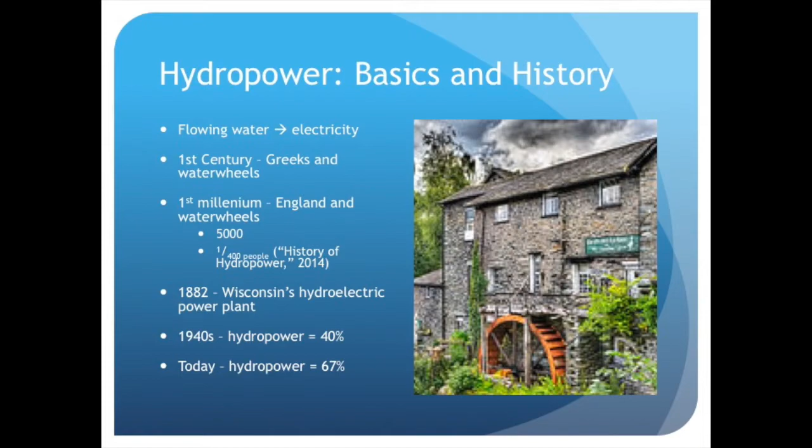The world's first hydroelectric power plant utilized the flowing water of the Fox River in Appleton, Wisconsin, beginning its operation on September 30th, 1882. 4 years later, about 200 hydroelectric power plants sprung up across the United States. By the 1940s, hydropower was providing 40% of all electrical generation. Today, electricity generated through hydropower makes up 67% of all renewable energy output.

Hydropower generation makes up the majority of all renewable energy electricity output due to its popularity, especially in China, Canada, Brazil, the United States, and Russia. Its popularity can be accounted for by the many advantages of using hydropower.

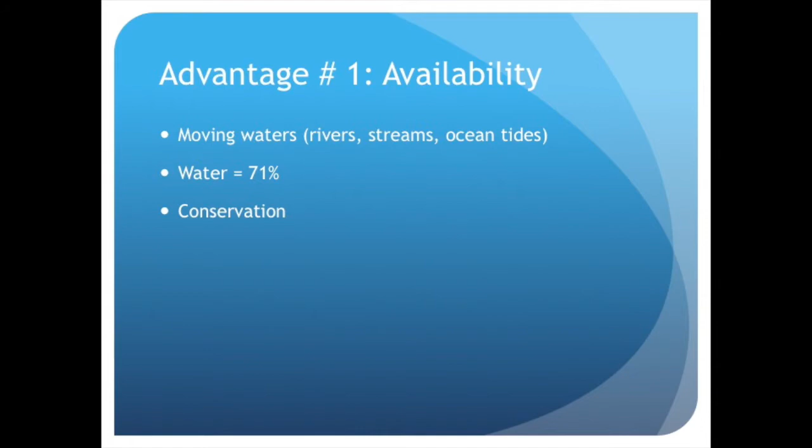First, there is the availability factor. Hydroelectricity only requires moving waters such as rivers, streams, and ocean tides to generate electricity. While water is not an unlimited resource, it covers 71% of the Earth's surface. Thus, as long as water is conserved and used efficiently, hydropower can continue to be used to create electricity worldwide.

The second advantage to utilizing hydroelectricity is its reliability. The demand for electricity can change rapidly, yet hydropower facilities can quickly go from zero power to maximum output, easily catering to these changes. Developing countries manage to function without electricity, but for the majority of the world, it has become a necessity.

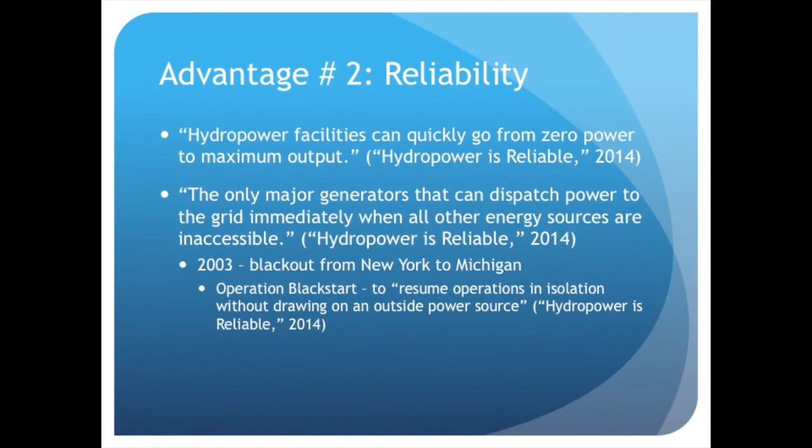Hydroelectric power plants are invaluable sources of backup energy because they are the only major generators that can dispatch power to the grid immediately when all other energy sources are inaccessible. This phenomenon was seen in the 2003 blackout, which affected an area from New York to Michigan, leaving 50 million people without electricity. The Niagara Falls and St. Lawrence hydroelectric plants restored power almost instantly, an operation called Black Start, which is the ability of hydropower plants to resume operations in isolation without drawing on an outside power source.

The third advantage of hydropower is its affordability. The figure below, provided in 2010 by Navigant Consulting Incorporated, compares the cost of maintenance, operations, and fuel for various sources of electricity. Hydropower is the least expensive, costing only 2 cents per kilowatt hour. In comparison, the most expensive source of electricity is photovoltaics, which cost 16.5 cents per kilowatt hour. Hydroelectric power is affordable because it generates electricity only from moving water. Thus, prices don't depend on unpredictable changes in fuel costs.

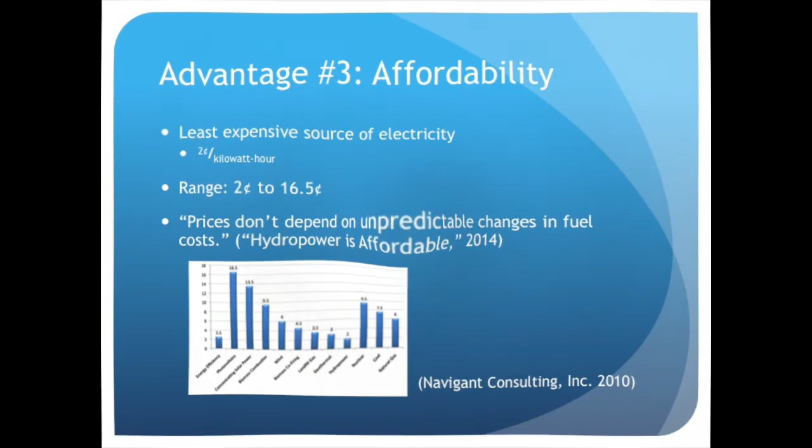Finally, hydroelectricity is sustainable. Countries use hydropower because it does not pollute the air, nor does it produce any toxic byproducts. Without the use of hydropower, nearly 200 million metric tons of carbon pollution would be released into the air, which is equal to the output of over 28 million passenger cars.

The map below illustrates the United States 2002 carbon emissions. In the Midwest to West Coast region, where hydroelectric power plants such as the Grand Coulee Dam and Hoover Dam are located, it can be seen that the level of CO2 emissions are much lower than that of the East Coast region.

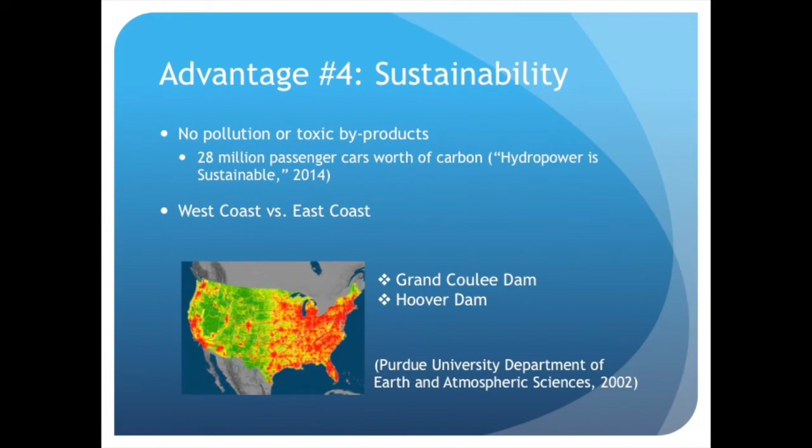With the numerous benefits of hydropower, it is easy to see why it is the major source of renewable energy worldwide. But how does it work? There are three types of hydropower plants: impoundments, diversions, and pumped storage facilities. Impoundments, the most common type of hydropower, use dams to trap flowing water in a reservoir. When the water is released from the reservoir, it flows through turbines, activating a generator that then produces electricity.

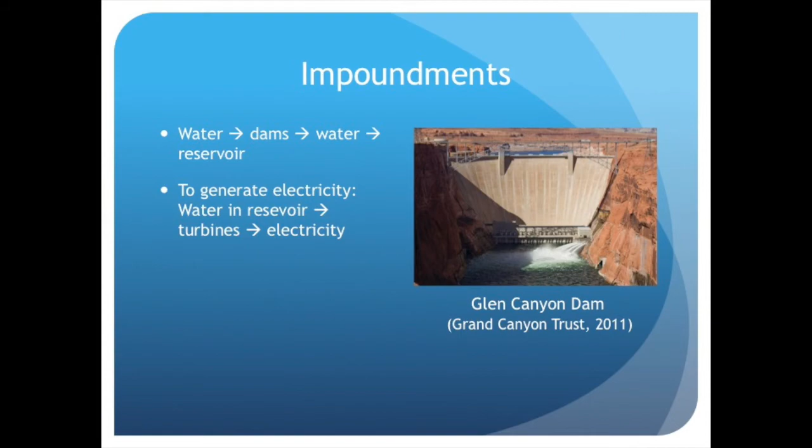An example of an impoundment is Glen Canyon Dam. Located on the Colorado River, Glen Canyon Dam provides 4.5 billion kilowatt hours to Arizona and the surrounding area. Diversions are similar to impoundments, yet instead of using a dam, water is directed through a canal or penstock.

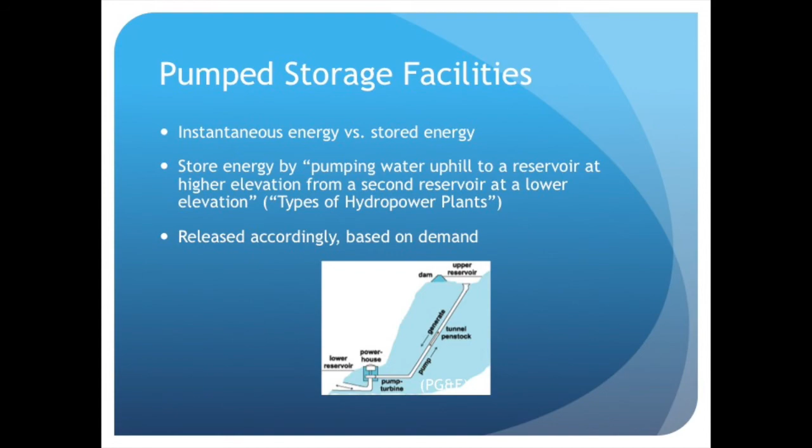A pumped storage facility works slightly differently than impoundments and diversions. Instead of providing instantaneous energy, pumped storage facilities store energy by pumping water uphill to a reservoir at a higher elevation from a second reservoir at a lower elevation. When the demand for electricity is particularly high, the water can be released from the upper reservoir to the lower reservoir, and then pushed through turbines, generating whatever amount of electricity is needed.

Hydropower requires man-made construction on bodies of water. Thus, although there are many advantages to its utilization, there are also disadvantages. The first disadvantage is the environmental damage that can occur with the installation of dams. Flora and fauna in the surrounding areas of the dam are not equipped to live in such a flooded area, and the disturbance can cause them to relocate or simply die out.

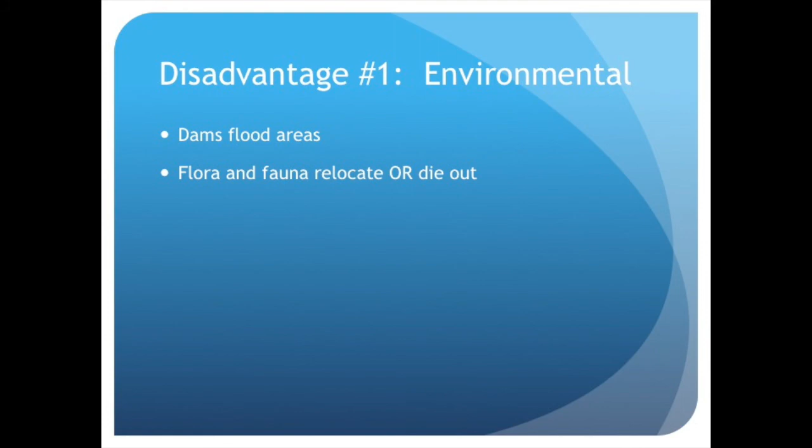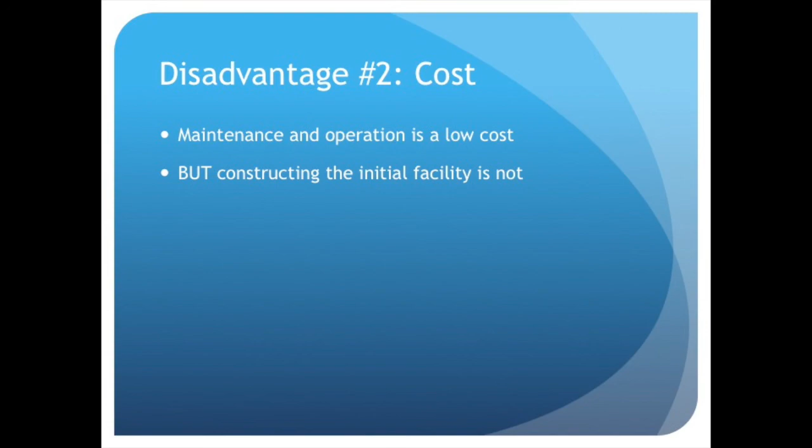In addition, although the costs of maintaining and operating hydroelectric power plants are low, it is expensive to build the initial facility. The cost of building hydropower plants prohibits many developing countries from beginning construction, though they potentially could.

Hydropower generates 20% of the world's electricity. It gains popularity daily due to its numerous benefits. Although developing countries currently have limited ability to construct hydroelectric power plants, I believe that the world's push towards sustainability and conservation will eventually make hydropower accessible to all countries, significantly raising the percentage of electricity generated through hydropower.